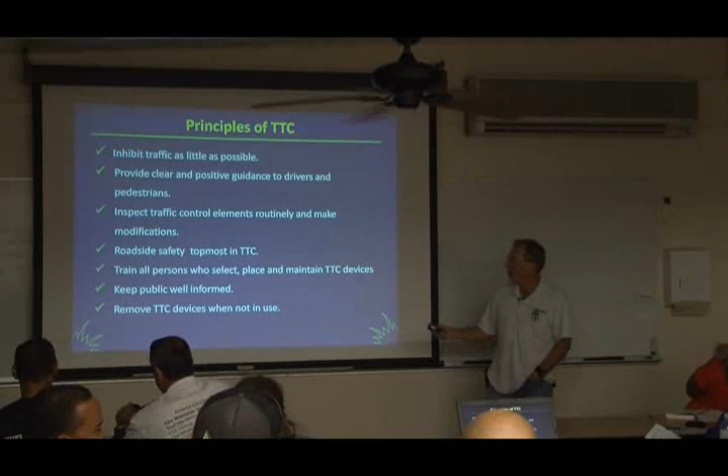So basically it comes down to training and keeping the public informed, and don't leave traffic control devices out when they're not necessary, yeah? Basic principles. If you look in the manual on uniform traffic control devices, there's 2.5 pages dedicated to principles of traffic control. But that just kind of sums it up.

Okay, the key things, though, that we're going to talk about mainly is visibility. Just like with your landscape maintenance zones, really you're trying to incorporate aesthetics with visibility, right? How much sight distance do you need from the road? Same thing with traffic control. How far away do the signs have to be seen by the motorist? How far away do the cones have to be spaced?

That's going to depend on the duration of the work. If you're going to stay in one spot all day versus if you're mowing and just moving along down the road, you don't have to set up the same type of traffic control. And the location of the work matters. If you're working immediately alongside the road, you're going to put up more traffic control devices than if you're up on the hillside. So where you are, how long you'll be there, and what the road conditions are for visibility will affect what type of traffic control you need.

Along the lines of visibility, to ensure your traffic control is effective, number one, the driver's got to be able to see you. Through signs, message boards, and arrow boards they get their information. Signs tell the motorists what to do, and you use cones and other devices to guide them in a clear manner. Try not to set up stuff that gets confused. Later on I'll show you some pictures that illustrate this.

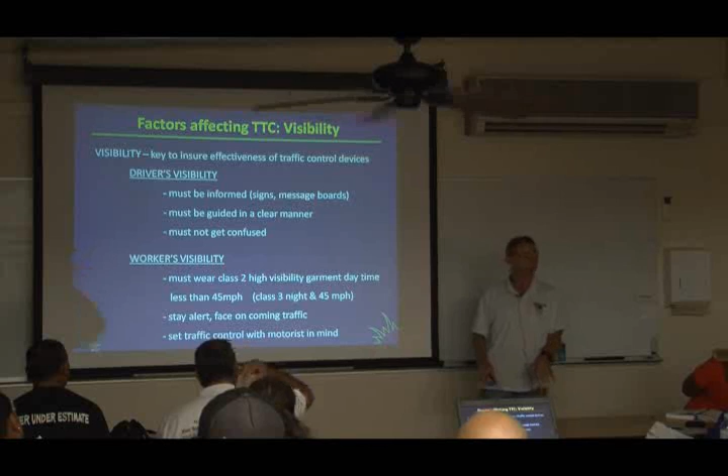Stay alert, face oncoming traffic as much as possible. That's kind of hard to do - that's mostly when you set up the traffic control, but when you're actually working, what are you paying attention to, your work or the traffic? You've got to kind of look up, look down, but try to face oncoming traffic, especially when setting up cones and signs so you can see what's approaching you.

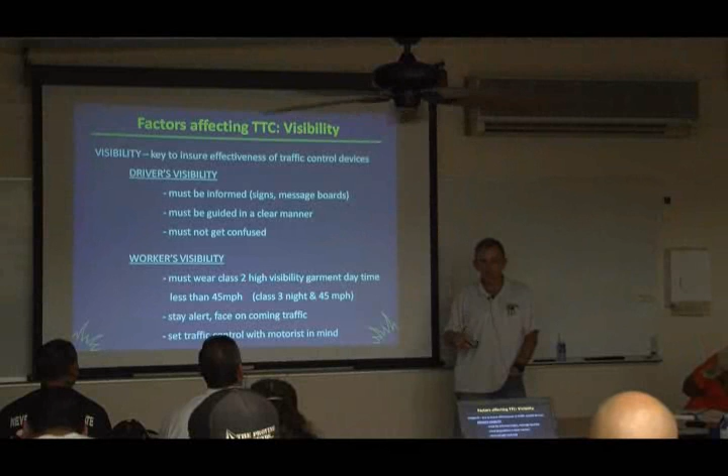Try to set up the traffic control with the motorists in mind, meaning put things so that the unsuspecting motorist coming along would make sense of it - like where the signs are, so they can read it and have enough time to react. A lot of the traffic control we're dealing with is about giving the motorist the reaction time, the opportunity to see something, cycle the information through the brain, and make a determination. For instance, why should a motorist slow down if you're only going to put one or two cones on the road? That doesn't look like high concern.

But if you put a couple signs and several cones, maybe that commands their attention a little bit more. But where are you and what are you doing? We'll talk about that in a couple minutes.

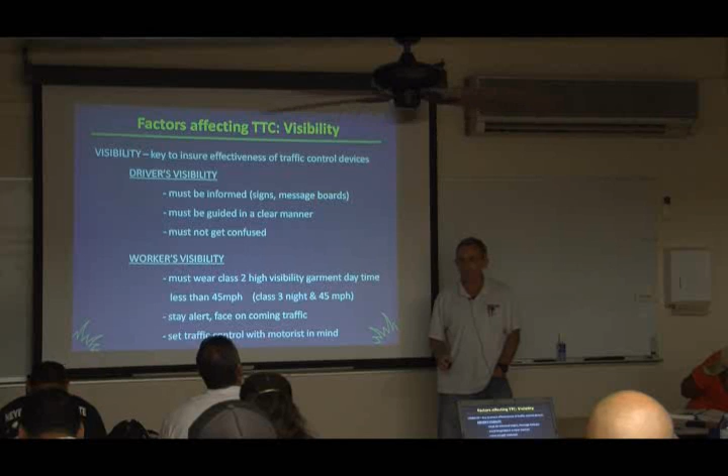So mainly, visibility is your priority when doing traffic control - setting up stuff so that drivers can see you, and you being visible to the driver. A lot of that has to do with where you stand, where you park your trucks, and so on. For instance, talking about visibility, things that affect it, like hills.

Other things that affect visibility would be, as I keep moving around, am I in your way? You okay? Okay.

Weather - sometimes you guys start working in the morning on a nice clear day, and by afternoon it's raining. The driver's visibility might be cut down - they cannot see so good in the rain, plus they cannot drive so good in the rain.

Have you guys ever been on a job where you started in the daytime, broke something, and had to stay out until nighttime until you fixed it? If you do that, are the signs and stuff you have out there reflective so the motorist can see it? Or did you put out non-reflective stuff that's no good at night?

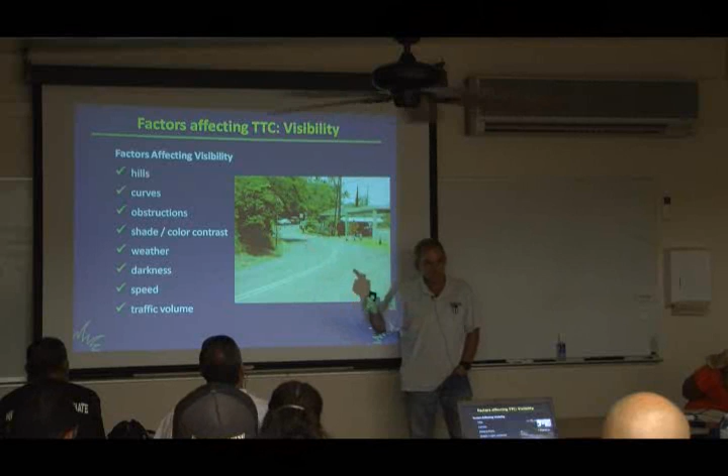Okay? In this case, they kept moving. They passed the flagman sign, they passed the one-lane road sign, and here they are, right next to the road work ahead sign. Is this safe? Not at all, yeah? You're a motorist, you're coming down this curvy road, you see the road work ahead sign, and boom, there's the guy right there. But that's how work and accidents kind of go hand in hand in creating a problem.

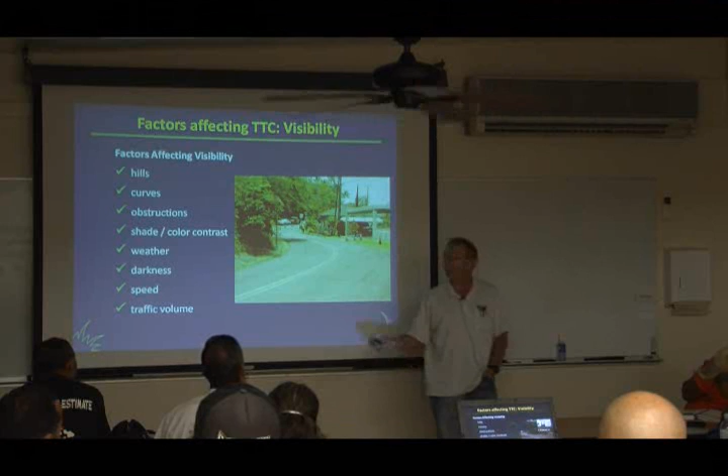These guys were working, doing their thing, and what they had set up in the morning as a good, safe work zone disappeared as the work progressed. In that instance, they should have told Hawaiian Telephone, hey, try stop, we got to move this traffic control stuff so that the motorists can see us. This was an experienced guy, and he's supposed to know better, but he was just doing his thing. And this is one of my guys. So this is the kind of thing that can happen, though.

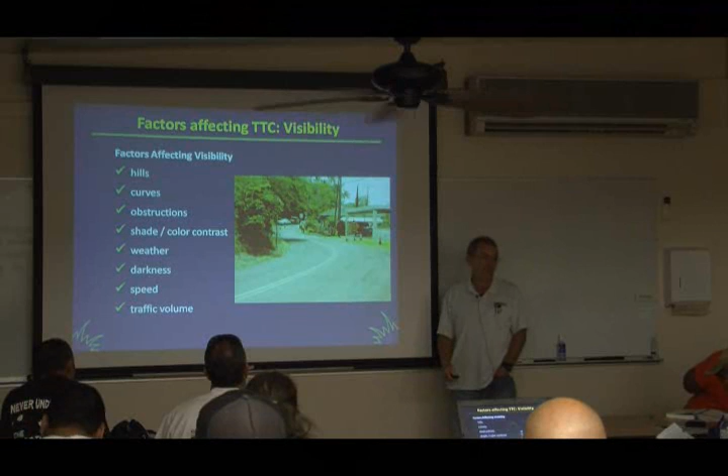But when we talk about visibility, color contrast, green on green, that's some of the stuff you guys got to keep in mind, especially you guys out doing landscaping. Maybe you might want to have orange vests instead of green vests for landscapers. Simple stuff, yeah?

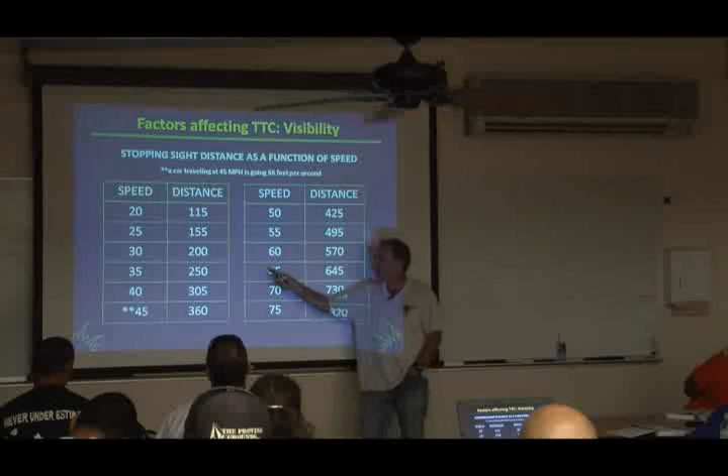Now as far as visibility goes, in the book there's the sight distance chart, and basically this tells you how much distance a motorist needs to see an object and react to it. Let's say, for instance, you're flagging. If you're a flagger on a road and you're in a 25-mile-per-hour work zone, between you and the motorist should be 155 feet of sight distance.

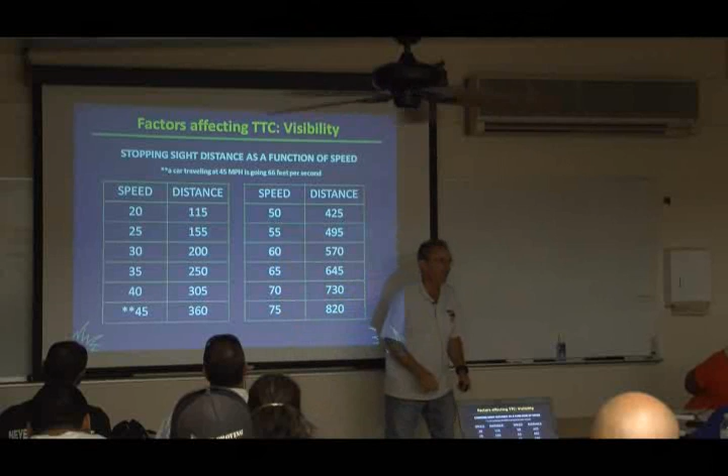So let's say you're in a 25-mile-per-hour zone, the motorists are driving along, and you're flagging, just as an example, and say you're on a curvy road. If you don't have at least 155 feet of sight distance with the car, chances are when you turn the stop-slow paddle to stop and tell the car to stop, they are not going to stop if you have less than 155 feet. So that's how speed and sight distance go hand in hand when working on the road.

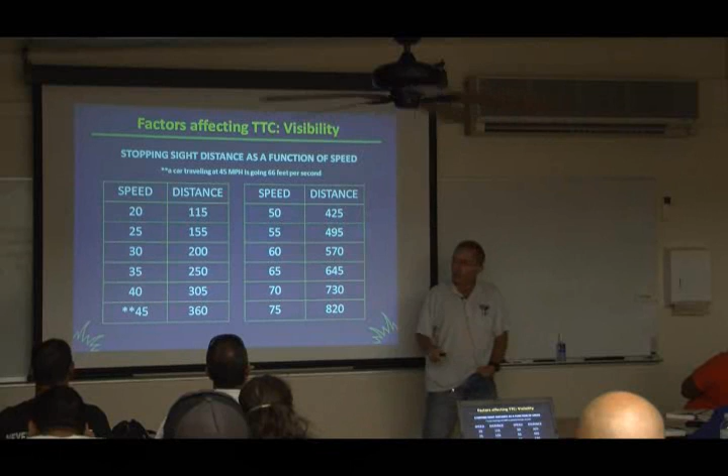We'll get to another chart pretty soon. It tells you how far to space the signs and so on. But as far as sight distance goes, even where you place the signs, the higher the speed, the further the distance needed. If motorists don't have the proper spacing, they don't see the signs, that sign is basically useless because the motorists can't read it. And if they can't read it, they're not going to pay attention to it. So basically you're putting up a sign for nothing, yeah?

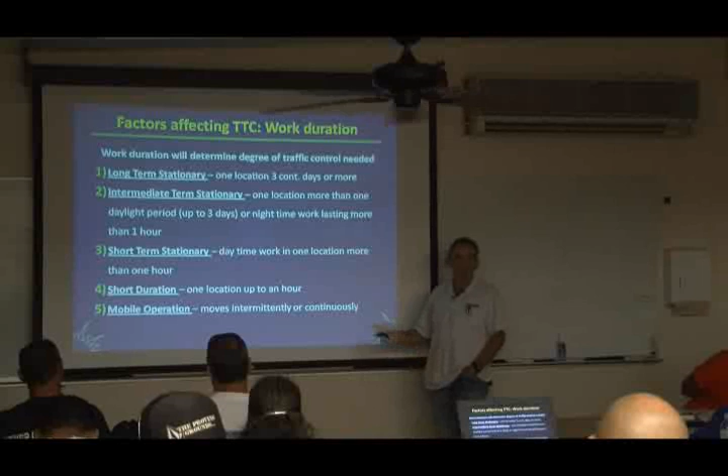Now I'll get into an example in a moment. This is kind of important what we talked about. Whether you're mowing and just shooting down the road, or let's say you're trimming a tree and you're going to be in one spot all day, cutting down a tree or whatever, you have different durations of work. And those durations of work will dictate how much traffic control you need to set up. So the basic breakdown, there's 5 categories of duration.

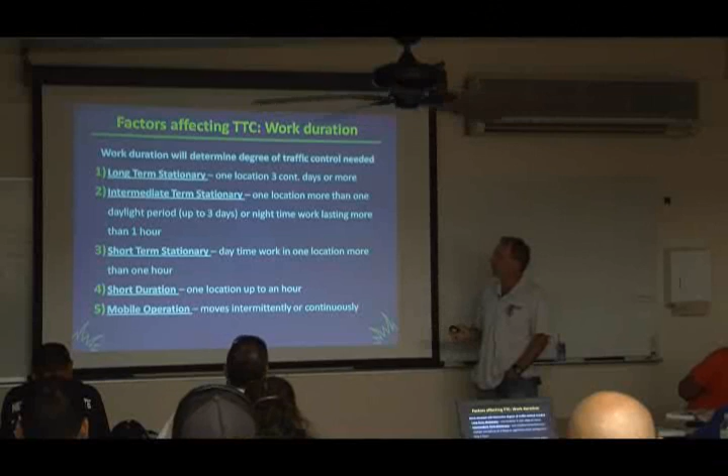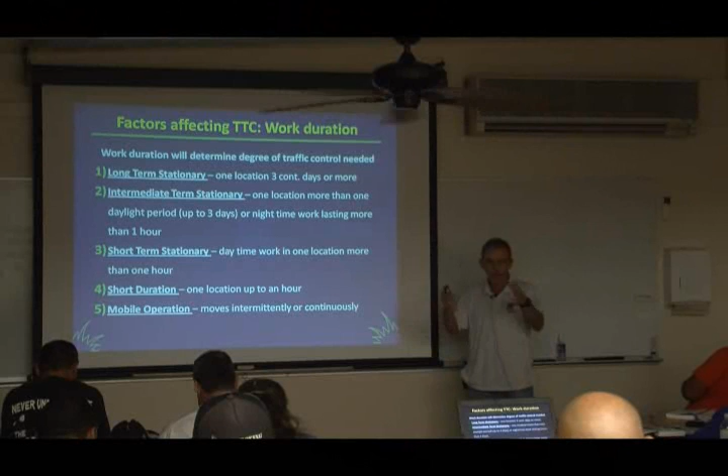One is long-term stationary. This is the kind of full-on maintenance reconstruction project where they stay in one location for 3 continuous days or more. We'll get into more examples of what each of those entail. The intermediate one is a location more than one daylight period up to 3 days. In other words, you're going to go to the same spot every day for up to 3 days, or one nighttime period. A nighttime period is if you're out on the roadway at night for more than 1 hour, that would be considered intermediate stationary. I'll get to some examples of these as we go along.

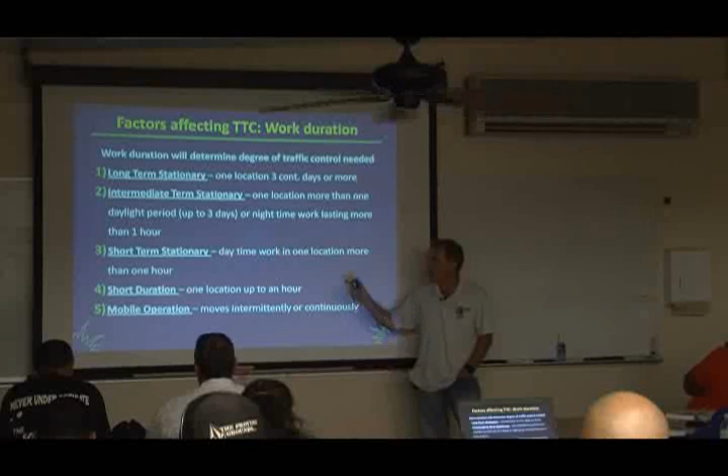Short-term stationary is the most common one. You work in one set location for more than an hour. Short-term stationary, daytime, in one location more than an hour. A short duration is in one location up to an hour, then you move. And mobile operation, that's just moving along.

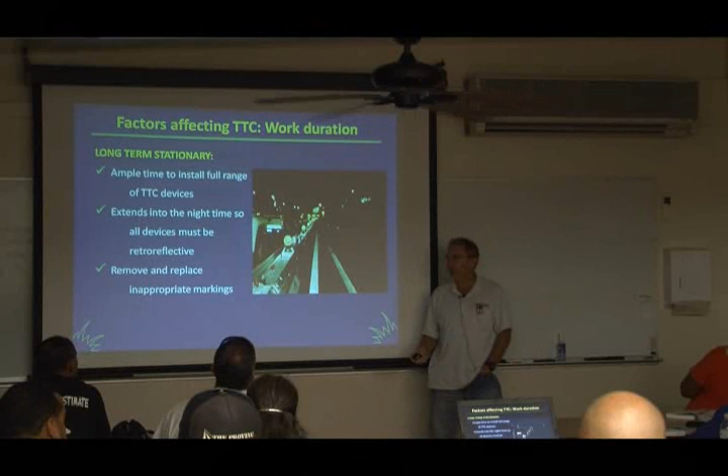Now what that means, basically, on the long-term stationary, you know you're going to be there a long time, like I said, 3 continuous days. That's when you've got to start setting up barriers, maybe do restriping, and everything has to be reflective. That's one of those that takes a couple days to set up because you're going to be there day and night, and you go through all that effort because you're going to basically reconfigure the roadway. If you're working in a location for a long-term duration, you need to go through more steps to protect the motorist. So long-term is when they set up everything, restripe, put up all the additional signs, everything.

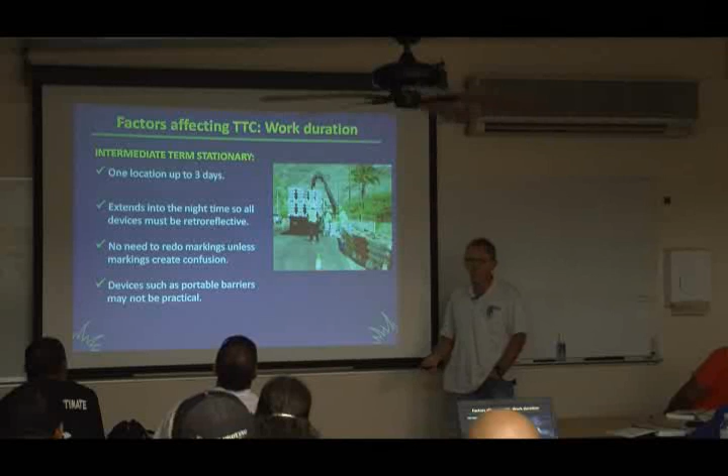Intermediate stationary, you're in one location up to 3 days. It might extend into the nighttime, so you want to make sure your devices are retroreflective, cones on your collars, the sign is reflective sheeting. Typically, you do not need to redo the striping, unless the motorists are confused or what you're setting up is going to conflict with the existing striping. But again, that's something an engineer would have to figure out. Pretty much that's stuff you guys wouldn't have to figure out.

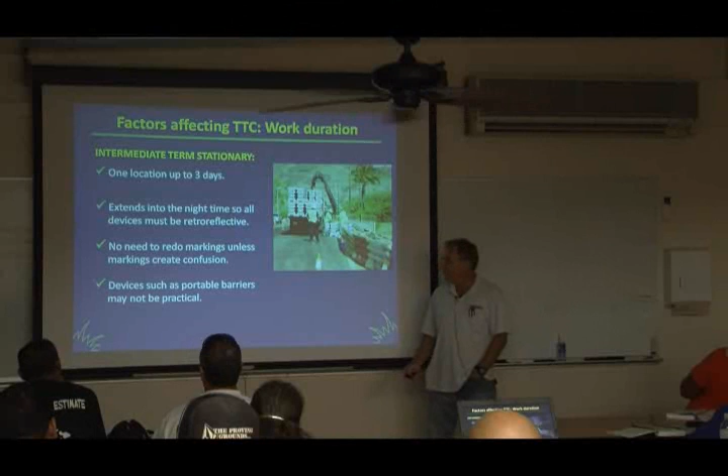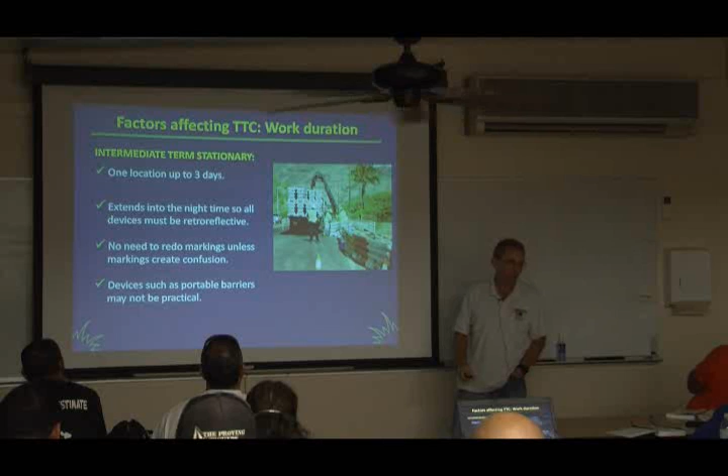And devices such as portable barriers may not be practical. You're not going to go through this much effort to set up a work zone if you're going to just be there during the day, leave, come back tomorrow and leave. If you're just going to work, say in this instance on the bridge rail, a couple hours today, come back tomorrow, you're not going to go through the effort of blocking it off. But if you're going to completely remove the bridge rail and be there for a couple weeks because you took out the rail and you're going to replace it entirely, then you're going to go through that extra work. So it depends on the work you're doing, how long you're going to be there.

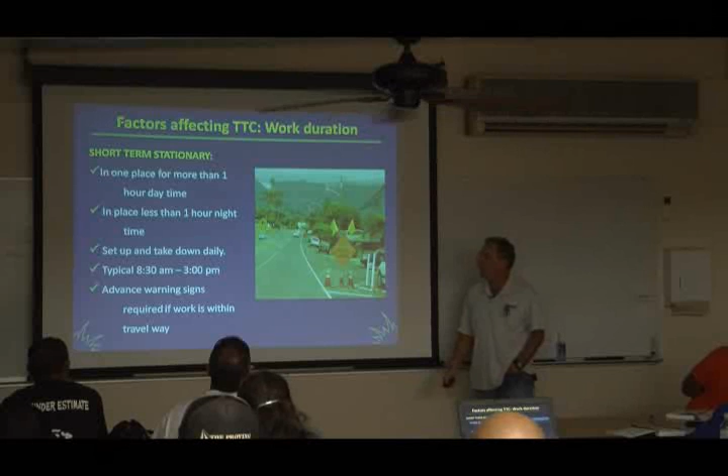This is the most common one, short-term stationary. You're going to be in place for more than an hour during the daytime, or in place less than an hour at night. Basically, it's set up and take down. Typical work time, 8:30 to 3:00, depends on what your permits are. And definitely you're going to put up advance warning signs so that the motorists, as they travel down the road, they can see something's ahead. They get information, so when they approach the work area, they have the information and hopefully will react accordingly.

This is probably the biggest problem that I see with a lot of the maintenance type work. A lot of guys figure, we're only going to be there a couple hours, they don't put up adequate signs, they don't put up adequate cones. When you talk to a lot of people, guys like you and me, there's two reasons they don't put up the signs. A, they get sent out on the road to do something and they don't have the proper equipment. Or B, they haven't been trained and they don't know.

So if you don't have the equipment, no matter what I tell you today, if you don't have the equipment, pretty much you can't set it up. This is where sometimes I get into trouble with supervisors because I teach these classes and I tell you guys, hey, you got to have these signs, you got to do this. You go back to work tomorrow and the boss tells you, hey, bro, just go. Oh, yeah, but the haole guy said.

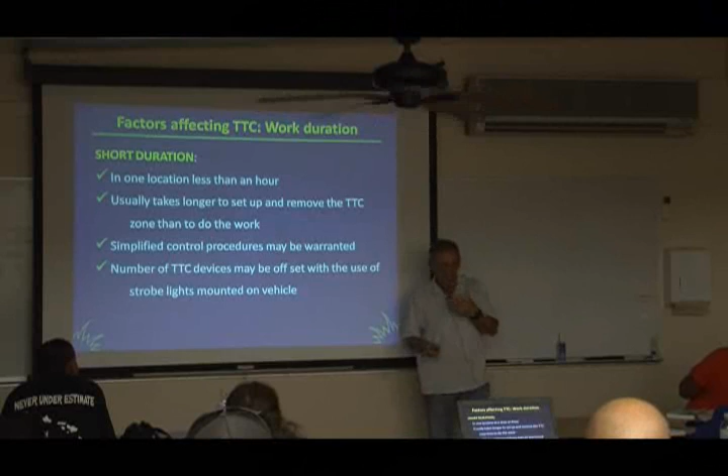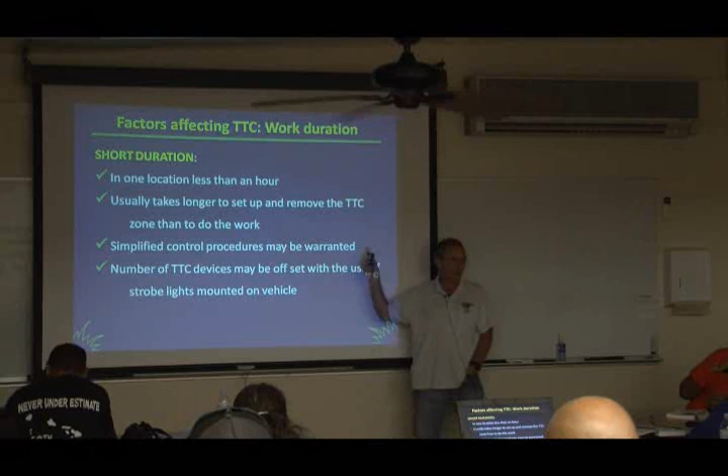Or what's another reason to put up signs, even if you're working on the shoulder, a little bit off to the side? Maybe pedestrians, bicyclists - it depends on where you are. If you're on, say, Kamehameha Highway instead of H1, you want to let them know, maybe they might want to think about going to the other side, keeping bicyclists or pedestrians safe. You've got to think about where you are and who is affected by your traffic control. Remember the principles - we're not just concerned about motorists. If you're doing a weed whacker, do you want pedestrians walking right next to you? Well, maybe you do, but maybe you shouldn't, because they're going to get hit with flying debris. But what, is the pedestrian supposed to know though? Maybe not, you know?

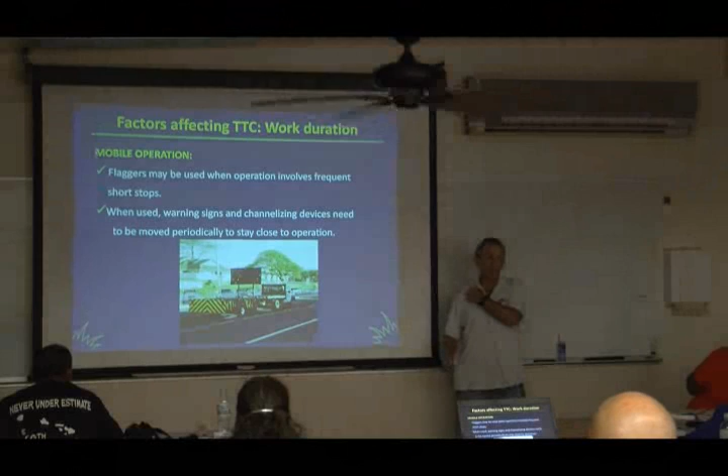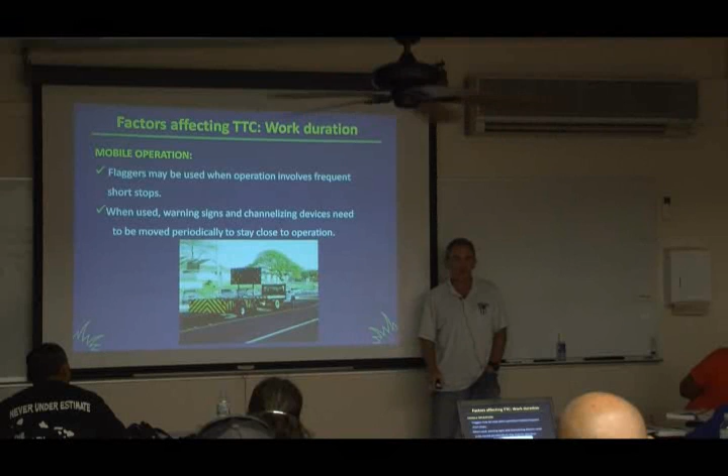Okay, and then finally, mobile operation. Flaggers can be used for mobile operations, provided they set up the proper advanced warning signs. Warning signs need to be relatively close to the work area if they are going to be used. And you cannot put up shoulder work ahead, road work ahead signs, start working here, and end up 8 miles down the road - those two signs back there mean nothing, really. But like for mobile operations, that's where we have this truck-mounted attenuator. We use stuff like this a lot for pothole patching. We just go down the road with the flashing arrow board on top, with a police escort, and we use this on the freeway when they do pothole patching. If an automobile crashes into this truck, that attenuator will keep the driver from getting killed. That's a total mobile operation.

If you guys get questions along the way, go ahead and ask. I may not have the answer, but you can ask anyway.

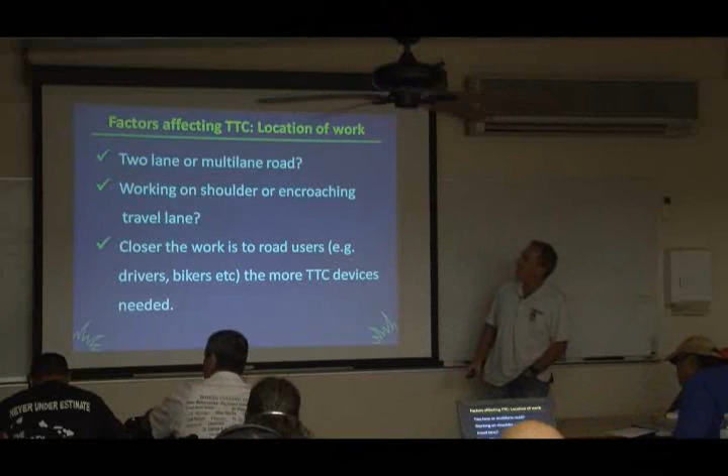Okay, so going back to the factors affecting traffic control. Is it a 2-lane road or a multi-lane road? Are you going to be working on the shoulder, or are you going to encroach into the travel lane? For sure, if you're going to go into the travel lane, like say you got to work on the right lane, for sure you're going to put up signs and cones.

But some guys, they don't. You'd be surprised - I've been doing this for 30 plus years, and I'm surprised there's not more people killed on the highway with their disregard for proper traffic control. Guys choose not to set up signs. They put 2 cones across the road and expect cars to be able to merge - they call that a taper. Speed limit 45, merge cars, no arrow board. I am totally shocked that there's not more deaths on the highway than there is now, because I see a lot of guys cut corners - good enough, no need, we're only gonna be here a short time, hurry up - or the boss sends you out and you don't have the stuff to do the job yet. But hopefully through classes like this, the word will get out.

The closer the work is to the road users, like bicyclists and pedestrians, the more traffic control devices you should use.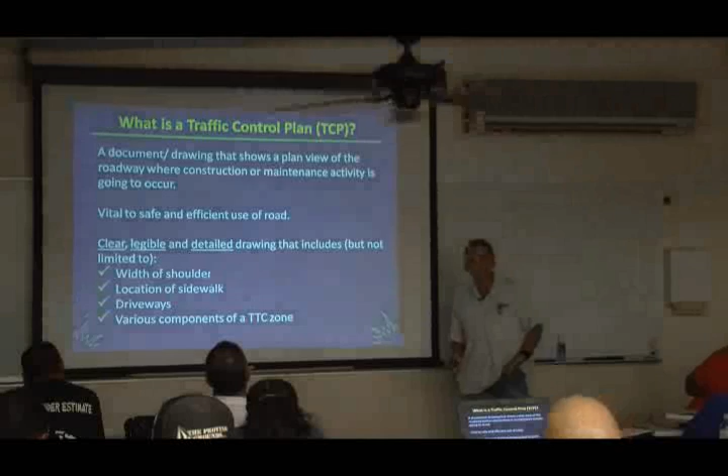So what is a traffic control plan? Basically, it's anything that communicates to the people involved what you're going to do with the traffic control. There are a lot of typical diagrams, and this information is available in all sorts of places. A traffic control plan is something you can draw up. Say your boss tells you, hey, you got to go work here. You guys talk about what you're going to do with traffic control, draw something on a sheet of paper, make sure you understand what you're talking about, make sure you have the right equipment, and share that with the crew and say, here's what we're going to do.

Sometimes, and this may not really apply to you guys, when jobs go out to bid to contractors, the blueprints that come with the job have traffic control plans drawn up showing how the contractors are supposed to set up traffic control. That would involve what signs are needed, what time they can work, where they can work, how many cones they have to set up. Very detailed, and it's drawn up by an engineer and approved through the bidding process.

Then you have the Manual on Uniform Traffic Control Devices. For state highways, when these jobs go out to bid, they also have special provisions, and in the special provisions is Chapter 645, which talks specifically about traffic control. A lot of the information in this manual is based on that Section 645 of the DOT special provisions. So we took some information from the Manual on Uniform Traffic Control Devices, the federal manual, plus the better parts of Chapter 645, to make the information available in your book right now.

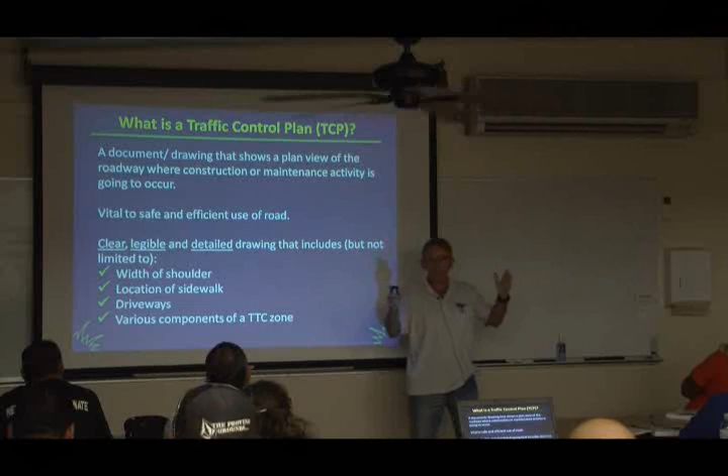The reason I bring that up is, as we go through some of the charts coming up, it's going to give you specific information—for this speed, you must set the signs this far apart, boom, there's a number. All of that information—sign spacing, taper lengths, buffer spaces, cone spacing—that is guidance. It is not a hard set law that cannot be deviated from.

For instance, if the manual tells you to put a cone every 25 feet, and you put the cones every 30 feet, is the cone police going to come arrest you? No. But if an inspector showed up and reviewed the job site and you didn't have a sufficient amount of cones, can the job site be shut down? Yes, the job site could be shut down.

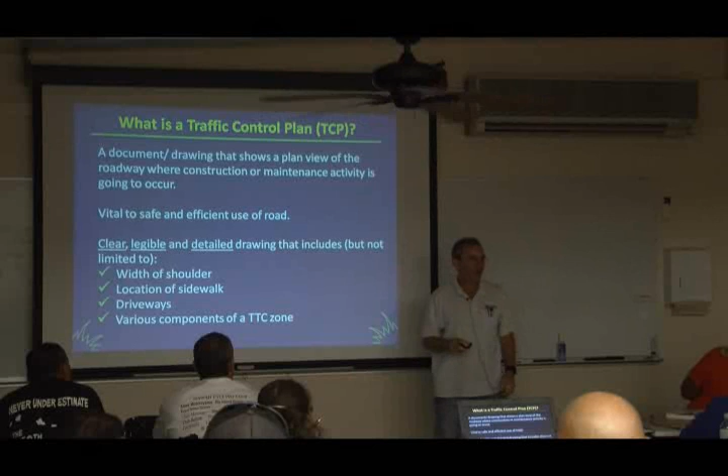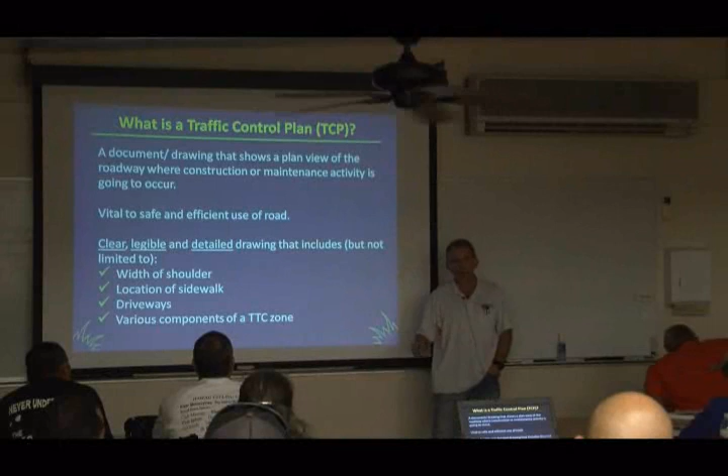Now if you're asked, why didn't you put the cones 25 feet apart? You say, well in that area we put them 30 feet apart so our truck could pull out. Is that reasonable? Yeah, kind of makes sense, right? Maybe the cones were too tight to let the truck pull out, so you guys left a 30 foot gap instead of 25 feet. Good judgment, reasonable, people can understand that. At least you have a reason why you did it, versus just saying, oh, we put them further apart because we didn't have enough cones. That's negligent.

Compare that to my 250-foot spacing example with the signs. Why didn't you put the sign 250 feet away? Well, because that was in the middle of the driveway, so we put it on the other side of the driveway, and now the sign was 260 feet instead of 250. But is that reasonable? Yeah, that's reasonable, right? So there's a lot of flexibility in how you look at traffic control.

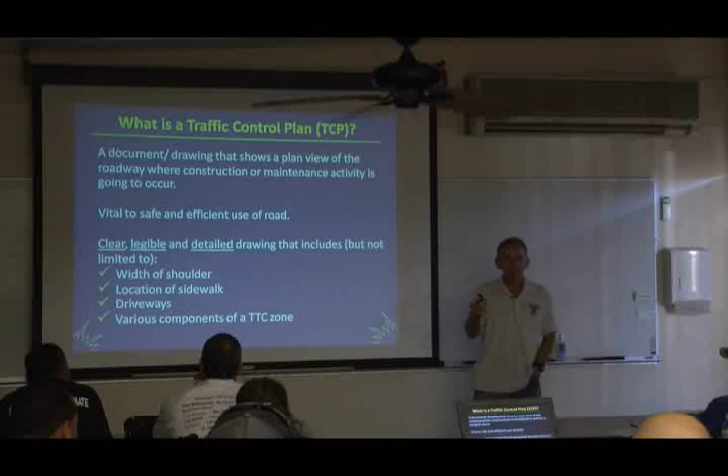When we talk about drawing traffic control plans, you take all that into consideration - why are you going to put the stuff where you put it? A plan doesn't have to be drawn out. For you guys, the workers, you go out there, look at where you're going to work, and decide how best to control the traffic where you're going to work. On site, you make your own plan. You guys are not contractors.

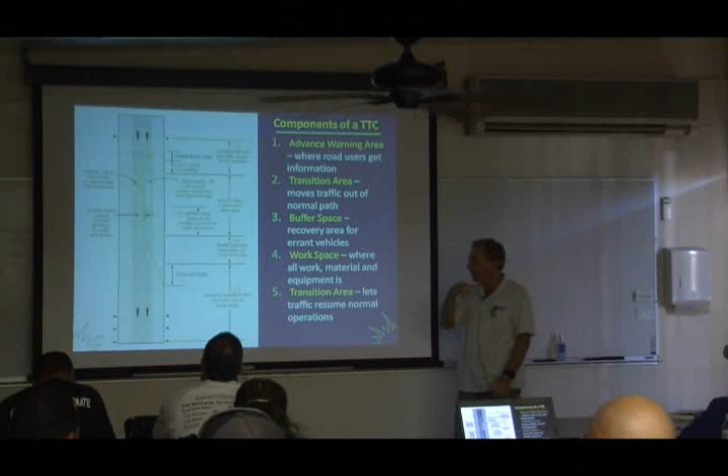Okay, I'm going to try and speed this up. I know you guys are getting bored, but this is good stuff, and you guys should try and understand this. Basically, in any traffic control, there's 5 components.

That's going to be the advanced warning area - that's where the signs go. Advanced warning, that's where the motorists get their information. In this case, that would be road work ahead, right lane closed ahead, and the merge symbol.

Okay, you have your transition area. That's where the motorists get moved out of their normal path. They're in the right lane now, and you want them to move to the left lane.

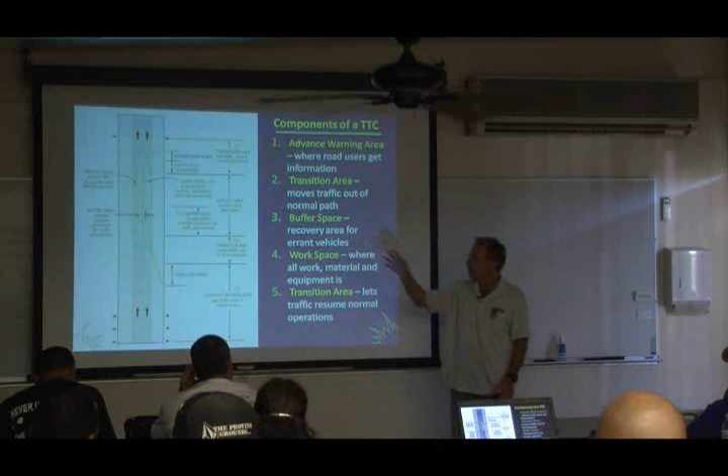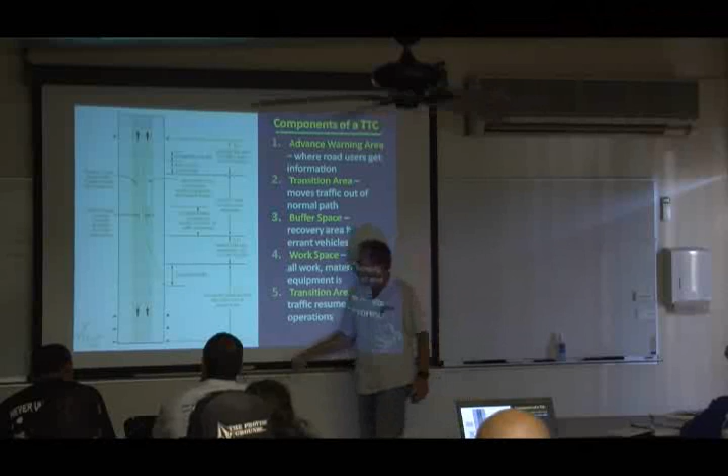You have your buffer space as part of your activity area, your buffer space and your workspace. The buffer space, that's a dead area with nothing in there, used as a recovery area for vehicles that just don't quite merge and need a place to go so they don't crash. So that's the area before the work actually starts, where if the motorist doesn't quite merge properly, they can pull in and stop before banging into something.

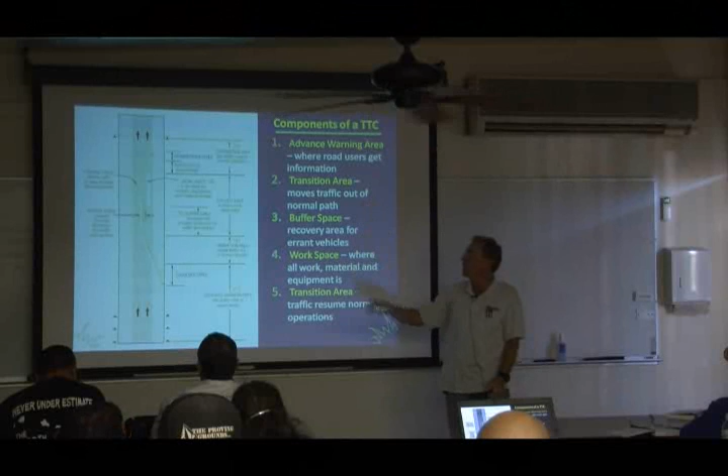The workspace, that's where everything happens, from your first piece of equipment to your last piece of equipment, or wherever you're working. And then, of course, your transition area, your termination taper, will let the motorists get back to their normal path. No matter what you're doing, whether you're flagging, closing 1 lane on the highway, or 2 lanes, these 5 components will always be there.

You always got to have advanced warning, right? You got to put up some signs, right? Now, in this case, it shows a merging taper.

But sometimes you're just going to move the motorist over a little bit. Say you're working on the shoulder but you need a little bit of the travel lane - so you're going to kind of small shift them over. That's still a transition, you're kind of moving them out of their normal path. Buffer space, try to create that space where if they don't quite move over, they've got a place to recover before they run into you.

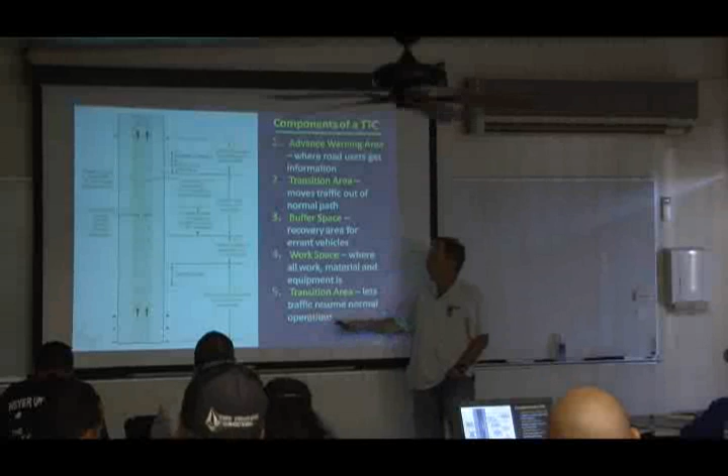You wouldn't be out there if you weren't working, so you're always going to have a workspace, but you got to define that - where is the first and the last piece of equipment, or wherever we're working. Then the transition, try to give the people that indication: okay, the road is yours again, you can move back.

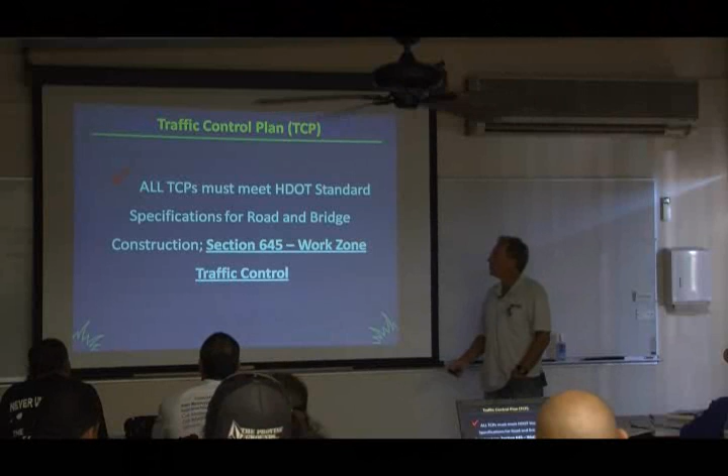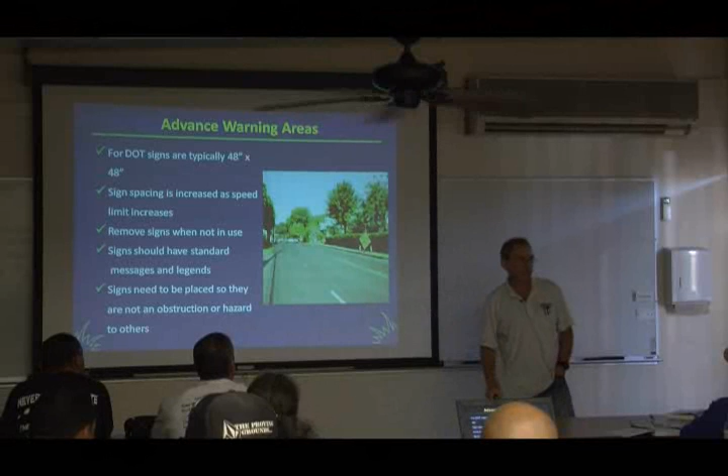All traffic control plans must meet DOT standards, basically that's the 645. Talking about advanced warning areas, typically we use 48 by 48 signs. A lot of times my company will use 36 by 36 inch signs when we work in residential areas, downtown, Waikiki, congested areas where there's not much space to put signs. Typically, you guys will use the 48 by 48 inch signs.

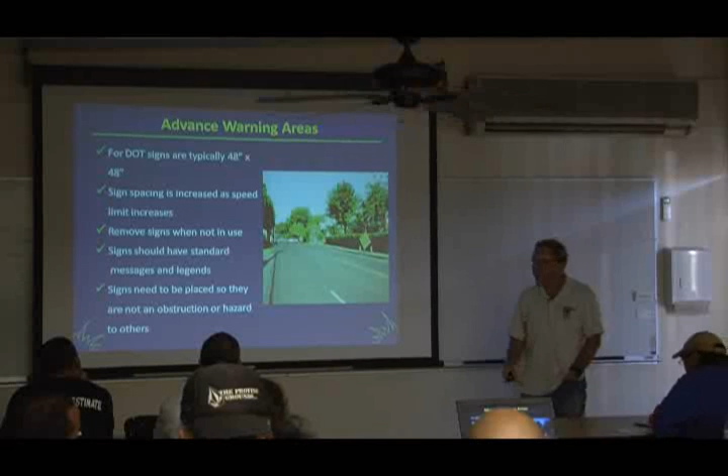Obviously, when we get to the chart you'll see the sign spacing increases as the speed limit goes up. For 25 miles per hour, a couple hundred feet apart. If we're on H1 freeway, these signs that close would be totally useless, it'd just be a blur. Roadworks, something else, bye, you know.

Remove signs when not in use. Why is that a good idea? You don't want to confuse the drivers, you don't want to give them false information. You know the story about the boy that cried wolf? People see signs up all day long, every day, and nobody working, eventually the signs mean nothing. That happens a lot, and that's why motorists sometimes ignore signs - they see it, nobody working, the sign means nothing. We don't want to train motorists to ignore signs. So just put them up, use them, and when you're done, take them down.

The signs need to be placed so they are not an obstruction or hazard to others. That's why I chose this slide. What is the potential problem with that sign where it's sitting right now? Pedestrians - if you're a pedestrian, where are you going to walk? In the road. Is that a good idea? Not really.

So that's some of the stuff you're going to encounter when you're out doing traffic control - where am I going to put the signs? Like in Maui, we had a job on Hana Highway, and we had to put all the signs - they were working on the Makai side. We had to put all the signs on the Makai side because that section we were working was a cliff, road, guardrail, small shoulder, and then more cliff.

There was no way we're going to put signs on the right side of the road, on the Mauka side. So we put all the signs for traffic heading out on the opposite side because that was the only place to put the signs. Our choice was put them on the opposite side or put nothing. We had to do what we had to do, and you're going to face that all the time. How did it work out? Nobody died, fortunately. The highway there is about 15 feet wide.

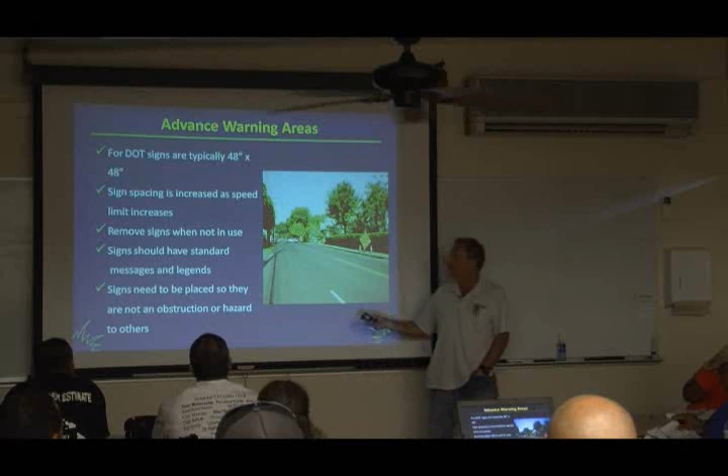Cars are doing 15 miles an hour. That's in the worst area where only 2 cars cannot pass at the same time, so it wasn't too bad. In this situation, what would you do? You're going to have to do like we did and just hope for the best with the pedestrians. What's your biggest concern - the pedestrians or the motorists? There's more motorists that pass. If this was a high pedestrian way, they'd probably have a paved walkway for the pedestrians, maybe a cement sidewalk or something. But with 1 or 2 pedestrians, hopefully they're smart enough to figure it out.

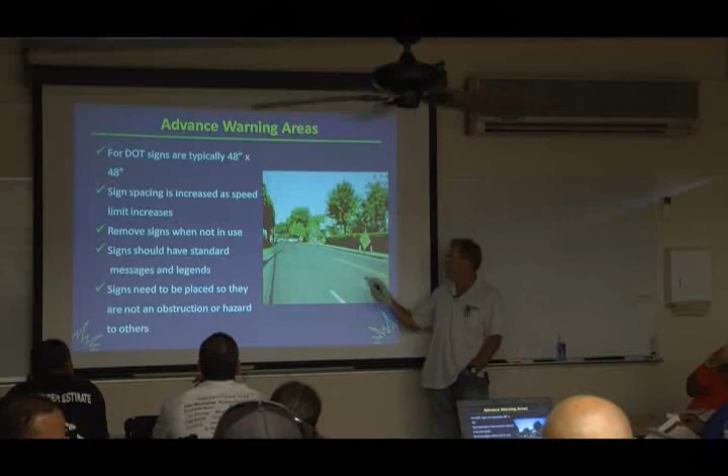But this is the kind of stuff you're going to be faced with a lot. Now getting back to what I was talking about, here is one of the charts, and for this slide we're going to talk about sign spacing.

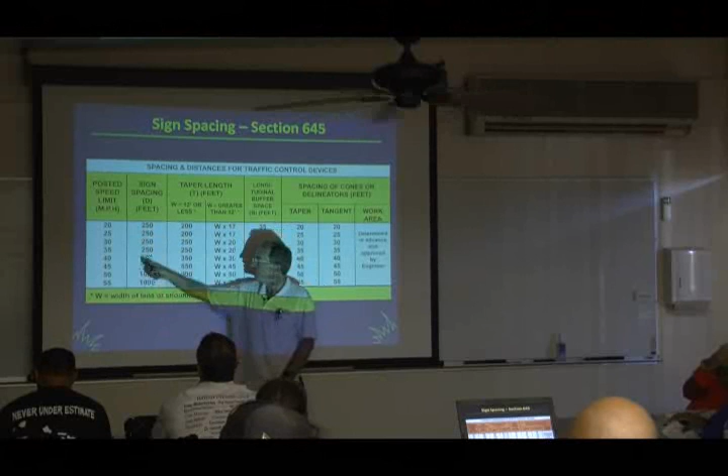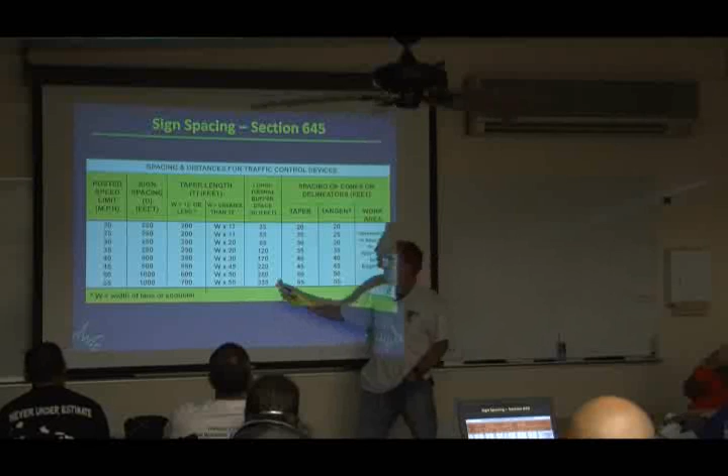And as you can see, the tapers get longer, the buffer space gets longer, the channelizing devices get longer, the spacer gets wider. But as far as sign spacing, this is your basic information.

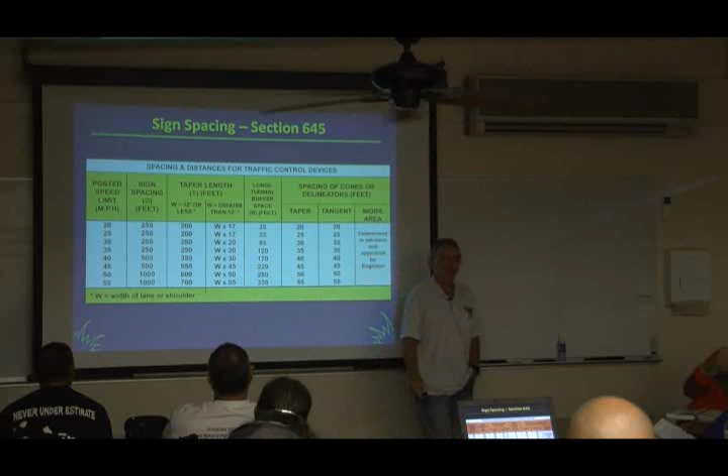So they're already down to a single lane, they're already kind of slow, now we're just guiding them along. But when you do traffic control in areas that have multi-direction driveways and stuff, it does get a little confusing. And like I said earlier, you try to set it up from the driver's perspective. When you set this up, try to think about how the drivers are going to negotiate through that traffic control. And if you're really confused, call GP Roadway, we'll come set it up for you.

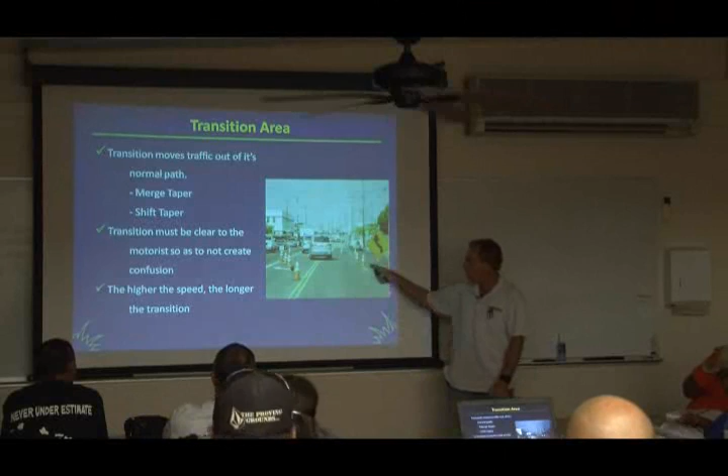Okay, so the opposite of short taper is long taper. When you set up, this is Likelike Highway, Kaneohe bound. This was a tree trimming project, they're cutting down the trees that were hanging over. Can you see the work crew? No, the work crew is not in this picture. The work crew is way down here.

So why did we set up the traffic control right here? Better visibility for the motorists. They came up, they're at the top of a hill, they're coming down. They're able to see this from a good distance, well before the work area, nice long straight taper.

And we did it, the work crew is working around the curve. We did not want to set up the taper at the curve. And because this road kind of has that one riser, flattens out and rises again, this was the flattest, straightest area, so we set it up right there. But you can see, 45 miles per hour, 550-foot taper.

Clear, visible. Now this is one of the things you got to think about too when you set up your traffic control. Even though the crew is working around here, not even in the picture, we set up the traffic control back here so that for the motorist, they could see it clearly, merge over, and then get to where the work crew is actually working. So sometimes when you think about your traffic control, you have to look beyond where we're working, so let's put the cones right here. Sometimes you got to think from the motorist's perspective, where's the best place to put it, the most visibility that will give us the safest transition. So that's what we did in this picture.

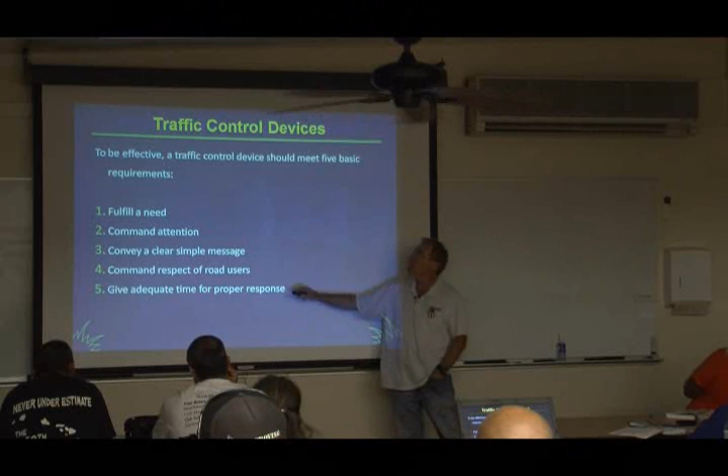Okay, to command the respect of the road users, it's got to look good, be presentable. And when you set up traffic control and put the devices out, you got to make sure they're set up so that you give the motorists the proper amount of time they need to respond how you want them to. In other words, put the right sign in the right place with enough spacing so they can merge, slow down, stop, change lanes, whatever. But it's all got to be part of the planning process. What signs do we need? What are we going to do? How are we going to put it out there?

Okay, so channelizing devices are used to warn road users of conditions created by work activities in or near the roadway and to guide road users. That's heavy, right? So basically what that says is you're going to put cones and other devices on the road to guide the motorist.

In Hawaii, we don't use drums so much, but we do use a lot of cones and barricades. Even a temporary raised island can be used as a traffic control. That's one of those things that gets put in with that long-term stationary kind of stuff, and that's kind of beyond what we do.

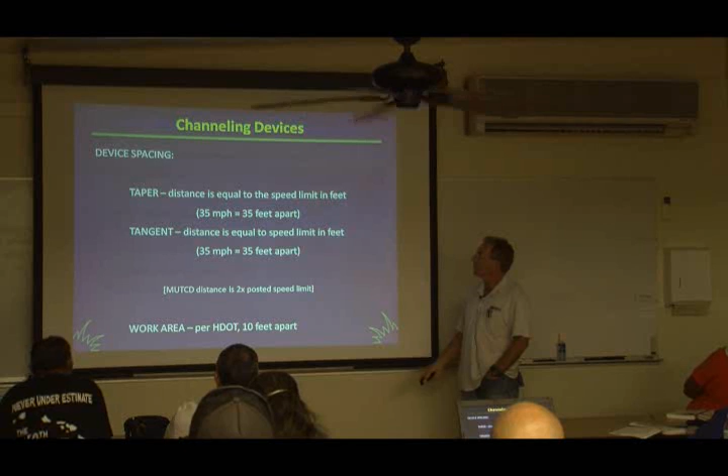Okay, so channelizing devices, when they're used, your spacing for tapers - basically, to keep it simple for you guys, when you're setting up a taper and going to put the cones, just basically put the cones same as the speed limit. If your speed limit's 35 miles an hour, put the cones 35 feet apart. Pretty simple. And then same thing with the tangent.

We'll get to that in a minute. Now in the MUTCD, the tangent is the section that runs along the work area. Basically, for the MUTCD, you can go 35 feet on the taper and then 70 feet on the straightaway - you can double it. But the 645 says to keep it 35 all the way through. So cone spacing for you guys is simple: speed limit equals distance.

You guys can remember that much though, yeah? So if it's 25 miles per hour, 25 feet apart. Not unless you have a good reason why you didn't - like there was a driveway right there, so we left a gap, something like that. So that's pretty much simple. You're gonna put cones out, or delineators or barricades.

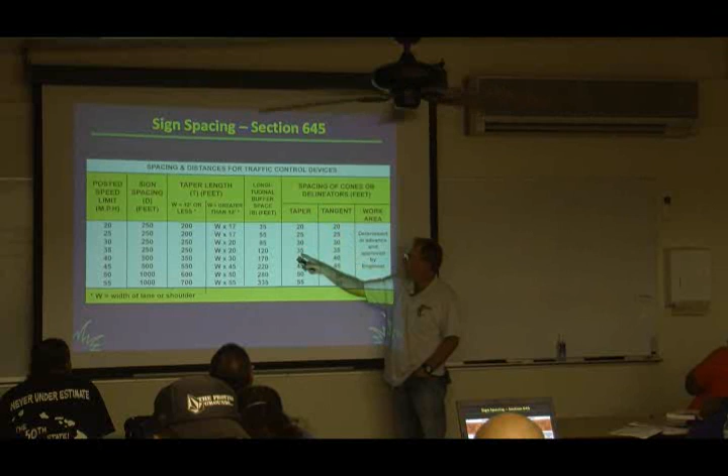Okay, boom, and again here's that chart. So you can see, like we were talking about, 35 miles per hour - you're gonna space your signs 250 feet apart. You're gonna have a 120-foot buffer. Your cone spacing, 35 feet, 35 miles per hour. Boom, pretty simple, yeah?

Simple, yeah? Please say yes. Okay, if you fell asleep, raise your hand. Oh, two guys. Oh my God.

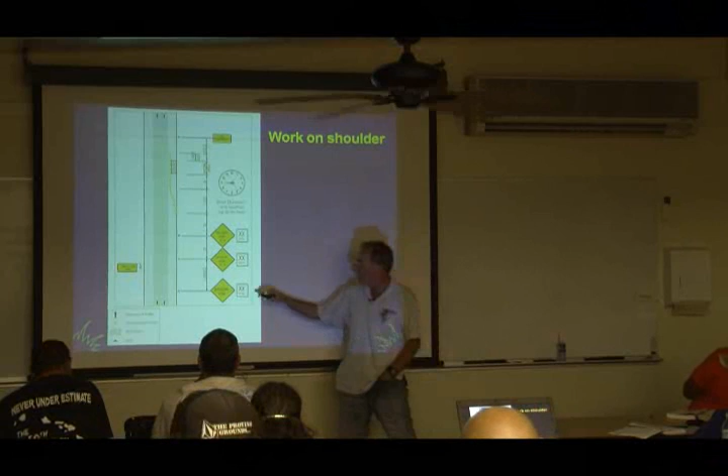Working on a shoulder - if you're actually working on the shoulder, you're going to put more advanced warning signs and actually cone it off because you're working there, doing physical work right there, and you don't want motorists to... Now, why would you go through the process of putting a taper on the shoulder?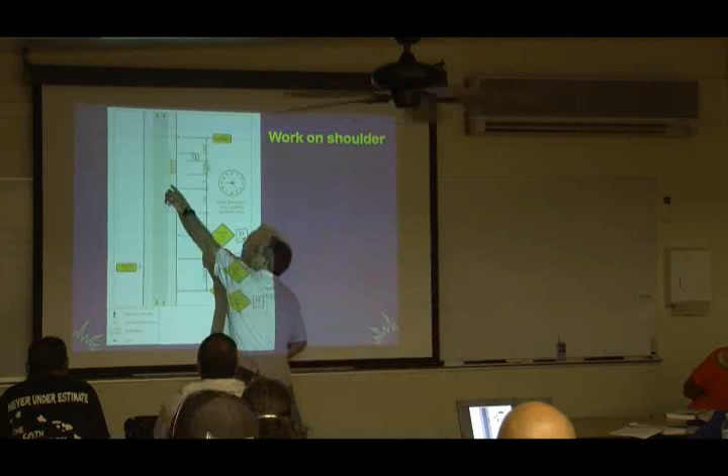If somebody has an emergency, say a flat tire, you want them, if they pull over, to see that they cannot go straight, yeah? You want to guide - that's what tapers do, they guide motorists away from an area, right? If you just put a couple cones straight across, would that be the same? Not really, yeah? So even though you're not in the travel lane, you still want to guide the motorist away from your area. And that's why you set up a taper on the shoulder, even though it's not an area where cars are going to be merging or pushed out of their travelway.

Again, it's like you got to think about how the motorists see it. They come up and you want to make sure they're guided away from where you're working.

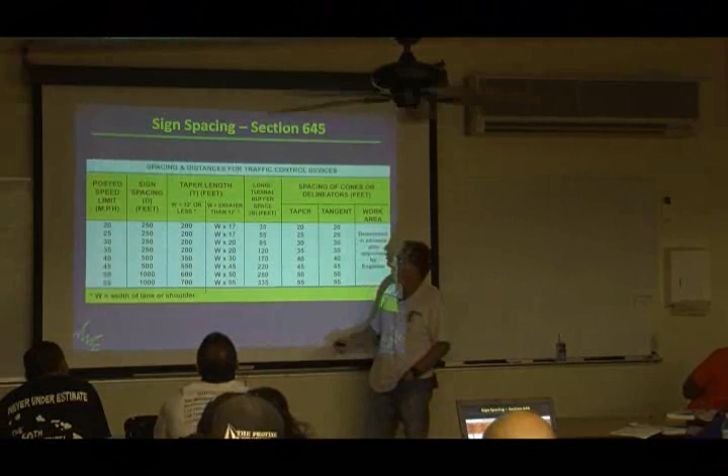Okay, let's go back a couple slides. Say your speed limit is 35 miles per hour. You're going to space your signs 250 feet, and your taper is going to be 250 feet. That's the part that guides the motorist out of the travelway. You guys with me on that? Taper guides the motorist out.

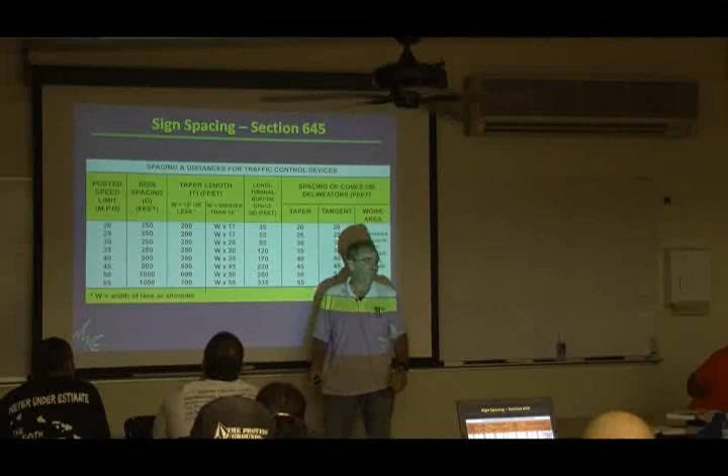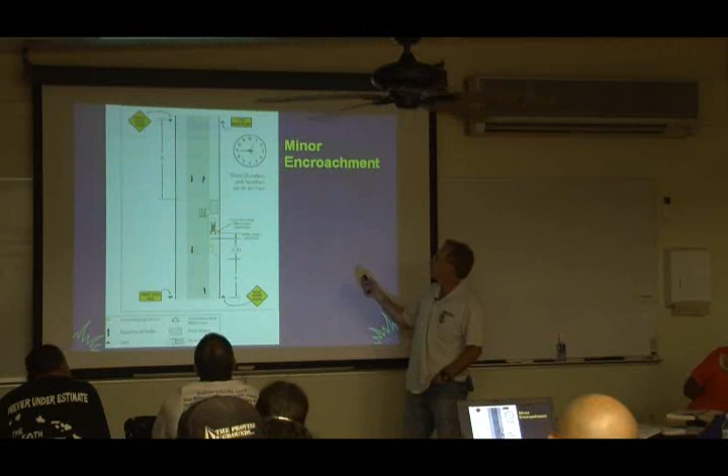So here we have like a mobile operation, minor encroachment. Sometimes you're going to pinch a little bit off of the travelway, but you don't have to close the travelway. Again, all these diagrams are in your book.

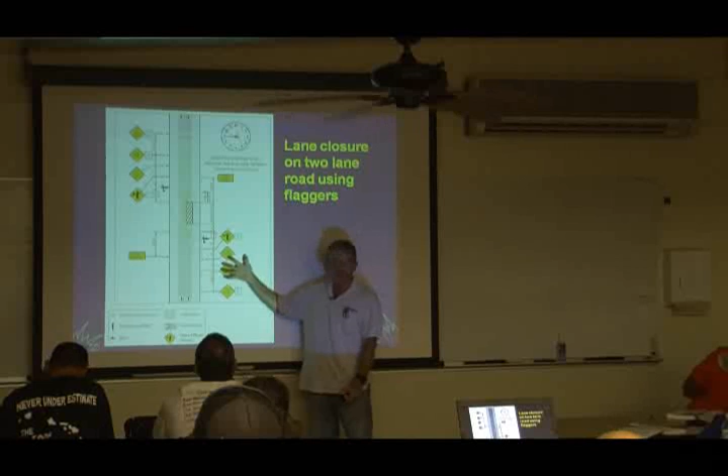Here's your typical flagman. Now let's go back to what we were talking about, the components of a traffic control. Advanced warning area - how many advanced warning areas are there? 2, right? 1 in each direction, right?

These signs make up the advanced warning area. Each sign is not an advanced warning area - they're a piece of the advanced warning area. Okay, so then you have your transition area, buffer space, work area, termination area. 5 components, just in a different configuration.

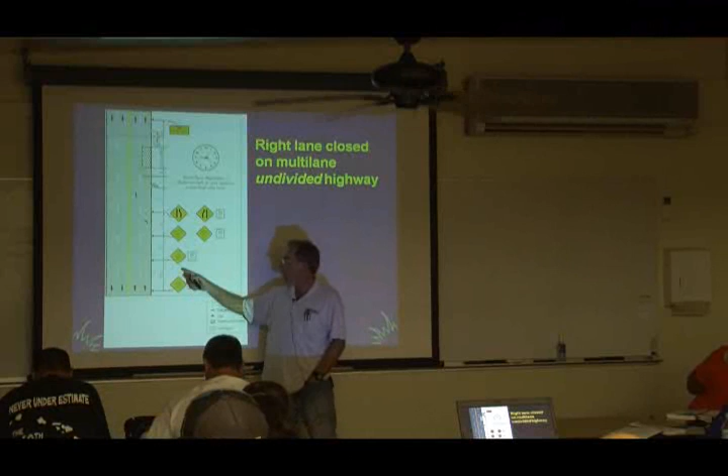Okay, right lane on a multi-lane road. So you have basic road work ahead, road work, right lane, merge symbol, arrow board, taper. If this speed limit was 35 miles an hour, how long would the taper be? 250 feet - we just talked about that 2 minutes ago.

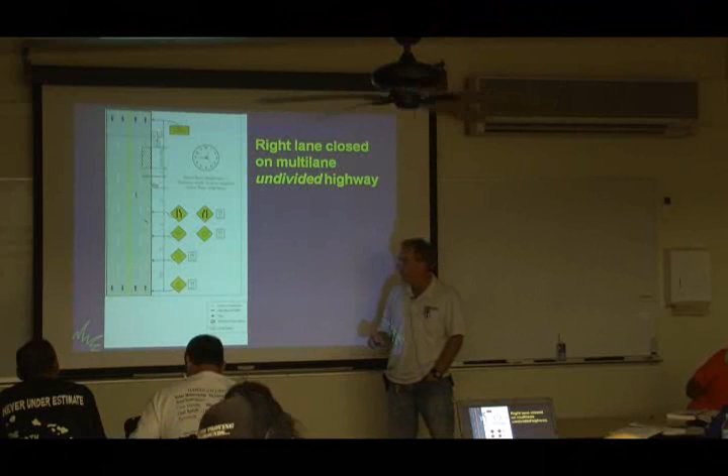Again, who fell asleep? No. Okay.

And then short-term stationary. Okay, we can turn on the lights.

Now we're going to do our group activity, our individual activity. Going back to what we were talking about, creating a traffic control plan. I hope you guys were following along with the book, because this is in your book.

What I'm going to do is pass out this sheet of paper. On this sheet of paper there is a drawing which has some instructions on it. A couple for you guys. Now read the instructions and we'll go over it. I'm going to have you guys draw your own traffic control plan.

This is an open book thing, so hopefully you guys got it. If I give you extra, don't throw the extra one at me. 1, 2, 3, I got enough here. 1, 2. Hey, did everybody get one? Let me know if I didn't count correctly. Remember the part I told you I'm not very smart? This is where it comes in, right here. Okay, everybody got one?

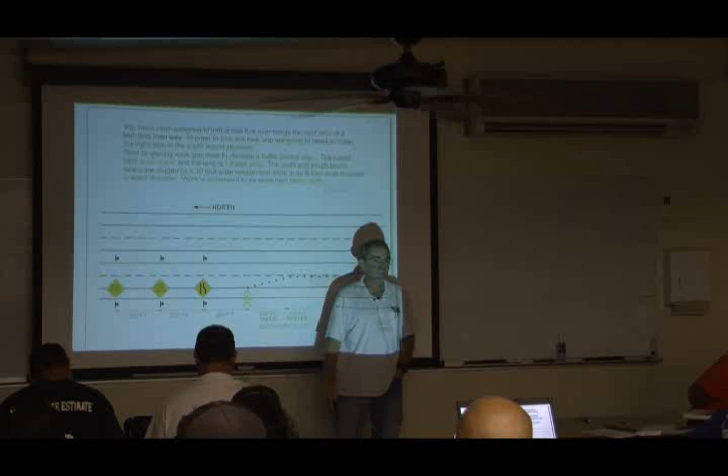So what was your first sign? Road work ahead? Was your sign spacing to the next sign 250 feet? Yes? Then your next sign was what? Right lane closed ahead? Sign spacing 250 feet to your merge symbol. Again, signs on both sides of the road, 250 feet, and an arrow board at the beginning of your taper.

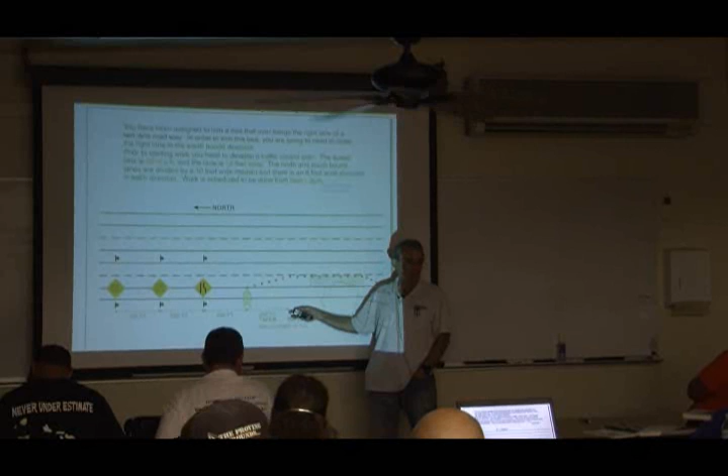Did you guys make a 250-foot long taper? How long was the buffer space? 120? 600... yeah, 120. And then the work area. And what's the last thing at the end? Termination area would be the cone, and then the end road work sign at the end.

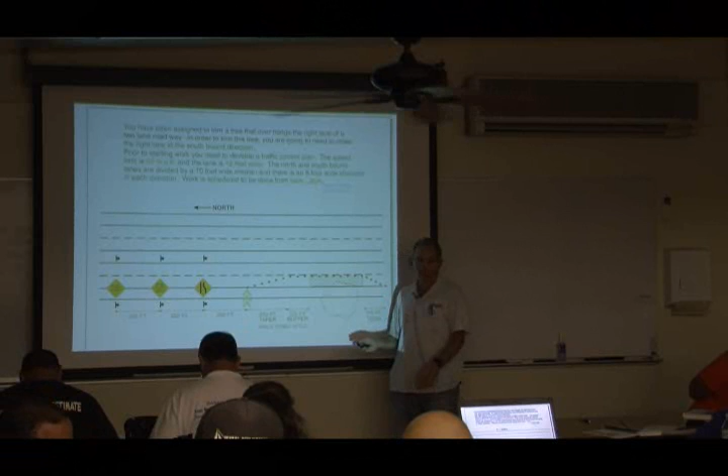Okay, so that's your basic plan, and you got that information out of the book—we had the charts and typical drawings to follow, right? Okay, who has any questions on that? Does that process make sense to you guys? Basically you guys are the end user, and this is the kind of stuff you got to think about if you're going to set up traffic control: where are you working, what's the speed limit, how long are we going to be there. Make sense?